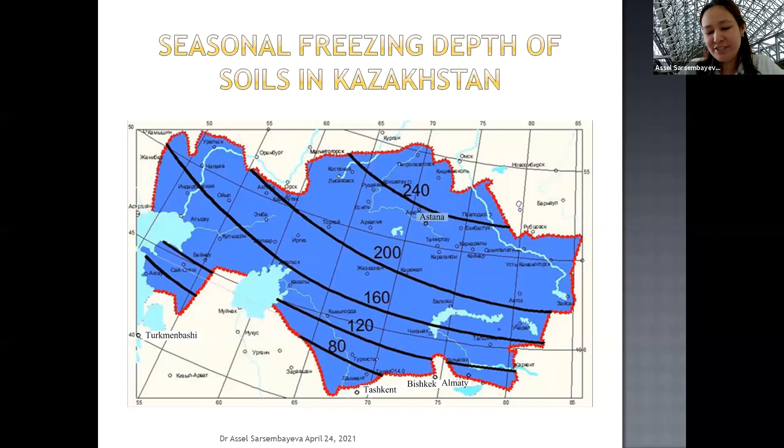We have snow and frosts in winter. The seasonal freezing depths of soils in Kazakhstan - here is our capital, previously called Astana, nowadays Nur-Sultan - the freezing depth in our capital is around 2 meters 30 centimeters. That's why mass transfer during freezing is really important in our construction.

We have snow storms occasionally. This photo was taken on 28th of January 2020, last year. It might reach 2 meters, and we usually use plowing and cleaning from snow on our highways, but it's not so awful - it's not very often, but occasionally we have such kind of weather.

So today we are going to talk about frost heave, and before dragging you deeply into the physics, let me briefly introduce you to frost heave. Frost heave is an upward swelling of soil during freezing conditions, caused by extension of the water and also by movement, by transport of water from the unfrozen part to the freezing front. This water segregates and constructs lenses which make the frost heave deformations. Uneven settlement from frost heaving causes deformation of structures and buildings, and here you can see an example of this deformation.

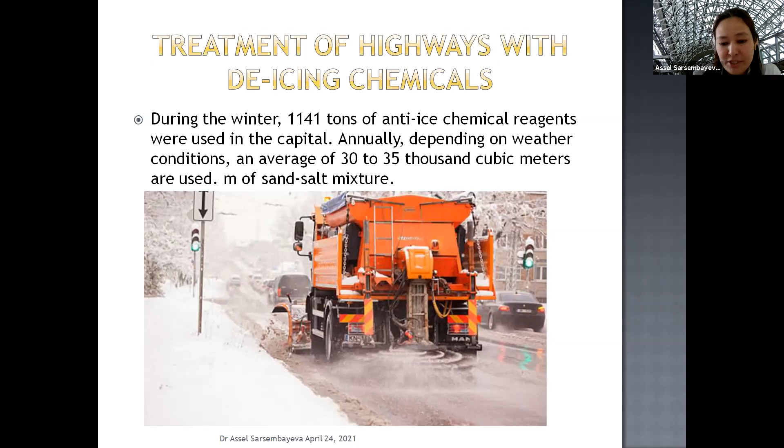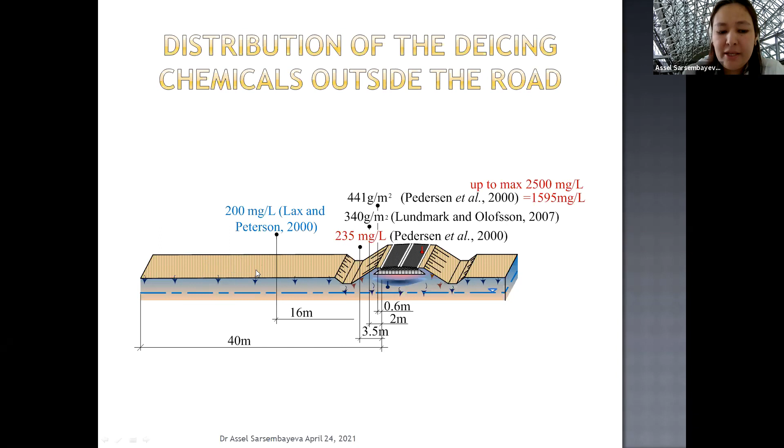Eventually, while this snow is plowed, it gets deposited on the roadside of the highways. According to the study of our colleagues from Norway, Finland, and Canada, we found out that the amount of chemicals deposited by the roadside area is definitely higher next to the road and lower, but extends up to 40 meters aside from the road. So all these treated de-icing chemicals during cleaning deposit on the roadside soils, and then eventually drop down over time.

However, we have some thoughts that these de-icing chemicals might not just drop down. We know that frost heave extensively happens under the pavement because, due to the high density and high thermal conductivity of the pavement material, the temperature of the pavement is much lower. For example, if the temperature of the pavement is -20, the temperature of the ground beside the road would be -10 to -15 degrees Celsius. So due to the temperature gradient, moisture is always moving from the warm side to the cold side. So we have some assumptions that these de-icing chemicals might migrate directly under the pavement layers.

That is why this research was conducted.

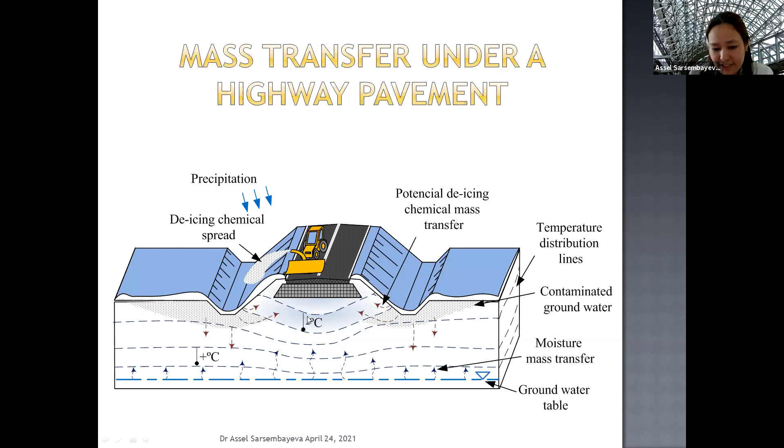Due to the frost heave happening under the road, under the highways, in springtime we meet such problems as pavement failure. So it might be surface layers, or it might be just caving of the subways.

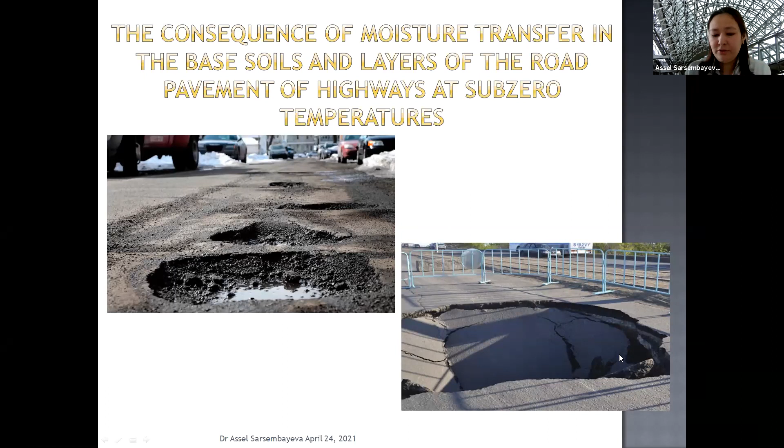So today we wanted to stop a bit, not too long, on the evolution of the frost heave theory.

Frost heave theory actually started from Taber in 1930, and it was developed by Everett in 1961, when he just used two cylinders and connected them by a tube. While freezing the top cylinder, the water was replenished to the ice, and the ice was growing at the top cylinder. That's how people understood that in an open system, meaning there is a source of water, the ice grows and causes frost heave.

The next model was the rigid-ice model of regelation, or regelation theory, by O'Neill and Miller. They made an experiment with a box of ice, placed a wire loaded on two sides onto a frozen cube of ice, and noticed that over time the wire traveled through the frozen ice under the load effect. The ice molecules were melting underneath the wire and refreezing back above the wire after it moved down. This meant that frost heave and freezing are directly related to pressure and loading.

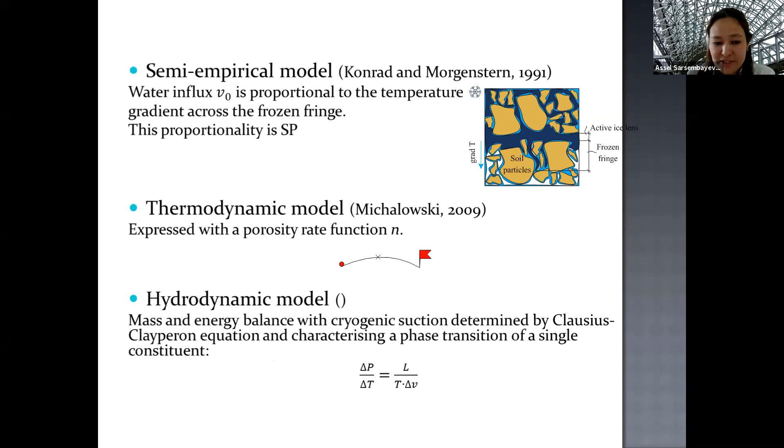Therefore, we have further research aims to study. First of all, we needed to examine the heat and mass transfer, and we got an application as highway subsoils because it's the most vulnerable element in construction, because for building construction we use piles which go below the freezing front, while in highway construction we need to layer the pavement which is above the freezing boundaries.

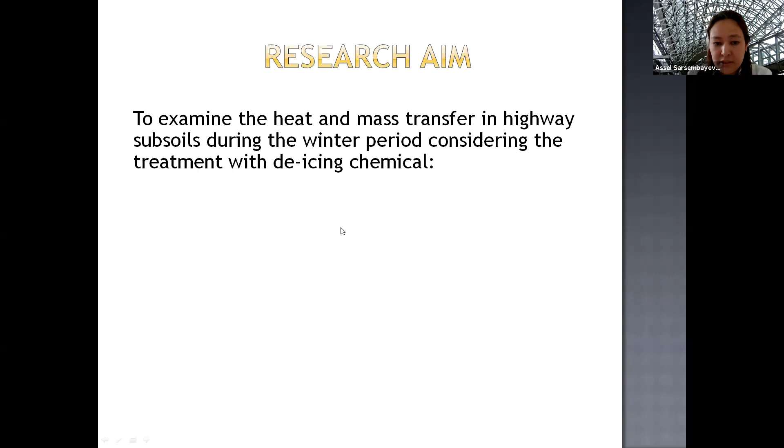So we first considered how the effect of de-icing chemicals actually affects frost heave, studying temperature and moisture distribution during slow freezing. Slow freezing is very important - it was disputed in the January meeting of the Technical Committee 216 ISSMGE, because many countries are using different test methods and are still disputing what kind of single method they want for testing frost heave. Slow freezing gives us the maximum rate of frost heave.

So we decided to do it very close to natural conditions. Second, to study how de-icing chemicals affect frost heave itself, and whether they migrate from roadside soils under the pavement. The next point is the role of vapor, because no one considered moisture exchange in a gaseous state. And the last one, we wanted to make a conceptual model of frost heave with vapor constituent.

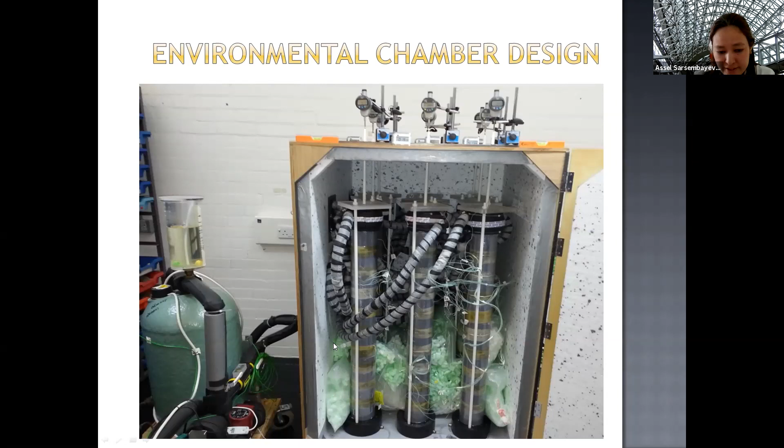The test design looks like this - this is the cooling unit, showing how we cool down the temperature at the top with the vertical linear gauge. I showed the valves so the flow might be regulated and the temperature would be the same at the top across all 9 columns. Here I showed how it looked after dropping to minus 25 degrees Celsius. To prevent condensation on top, I placed a cling film on it so no condensation might go inside, and the inner surface was lubricated with ointment and oil.

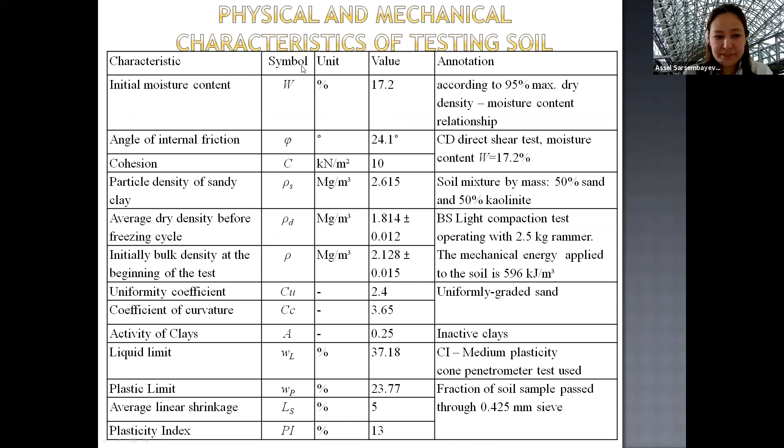This is a picolog - 12 picologs were used along with 105 thermocouples. This is the tube connected to the fridge at plus 4 degrees, supplying the sample from the bottom. The physical and mechanical characteristics, the initial characteristics of the soils, are represented in this table.

This is how the samples were made to provide the same density. The energy by hammer was calculated corresponding to the Proctor test, the standard Proctor test by BS British Standard, and it was calculated for each cylinder. They were like Lego elements, assembled with plastic collars one above another. The volume of each collar was 10 centimeters high and 10 centimeters in diameter. 63 blows were required with a 2.5 kilogram hammer to provide the required density.

So this is the way it was done - we divided it into 5 centimeter layers and made a unified structure for the sample, growing upward with the collars assembled. After that, with cling film, it was properly hydro-isolated and vapor-isolated, plus there were latex collars at the connections so no water or vapor might leak out. It was absolutely hydro-isolated.

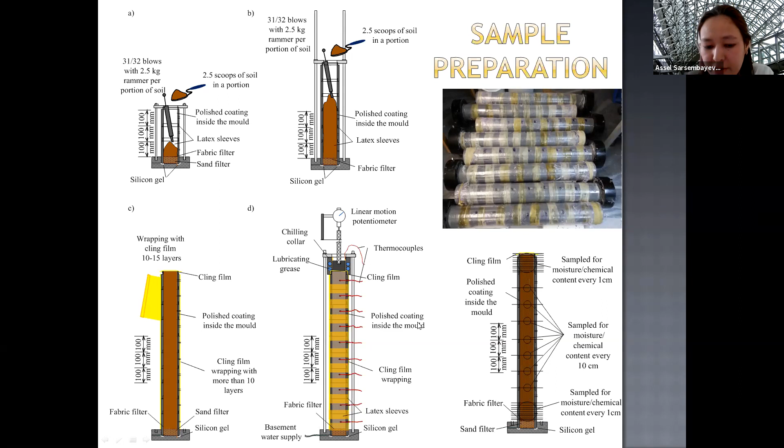How did we get the soil samples themselves? We tried to make this sample as close as possible to the natural soils of Astana, and by density, by liquid and plastic limits, we found out that the mix of kaolinite and sand makes the properties very close, and by Proctor test, standard Proctor test, we found out the maximum dry density and optimum moisture content curve.

Experimentally, we found out this curve, and we know that under the highways, the dry density which is aimed to achieve is 95 to 90% of the maximum dry density. So we got the maximum one, 1.9, multiplied it by 0.95, and got the desired density under the highways. It corresponded to 17.3, 17.1, 17.3 moisture content. So we got these parameters to use as initial for these soils.

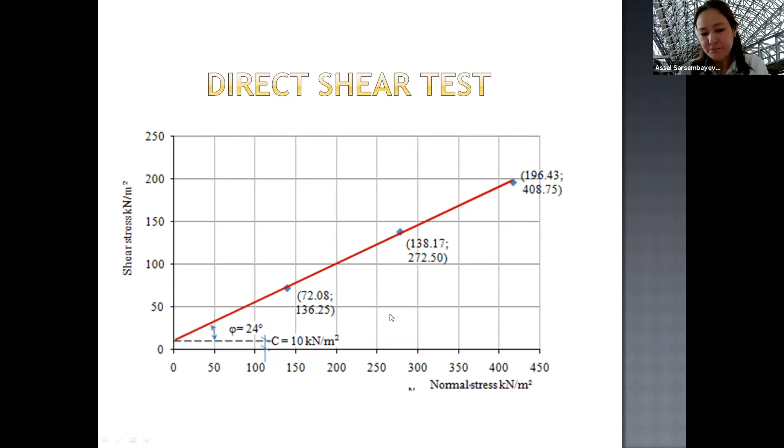We conducted several CBR tests, a series of CBR tests in a triaxial rig. There is a surcharge on top of each sample, and in our testing sample there is a surcharge equal to 3.5 kilopascal. This surcharge represents the weight of the pavement.

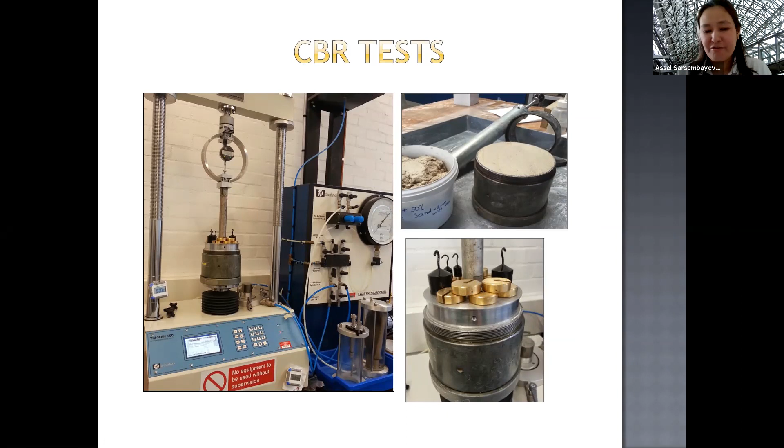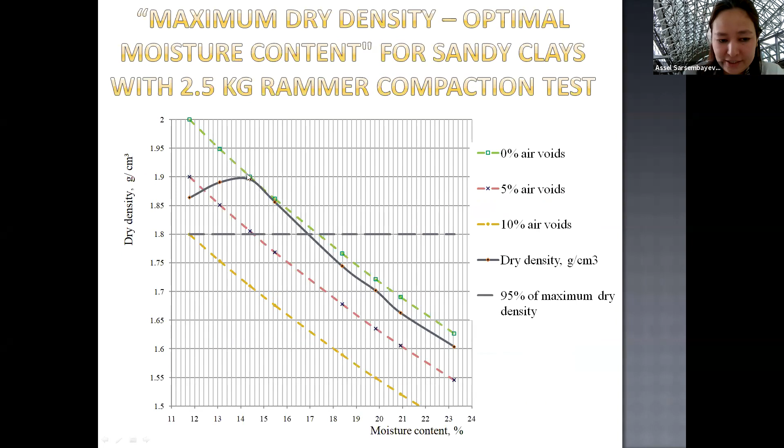So by California Bearing Ratio, we found that at 17% moisture, we got 10% of the required bearing capacity. While at maximum level, at 14% moisture content, it was 100%. So we got it as 100%, and while increasing the moisture to 17%, we found it dropped from 100% to 10%. So initial bearing capacity was 10% by the California Bearing Ratio test procedure.

The temperature was decided to be cooled down by 2 degrees per day. It started from 0, or just above 0 at plus 3 degrees, to initiate freezing at the top, by 2 degrees per day, down to minus 24 degrees by the 12th day.

So there were 2 freeze cycles, traditionally conducted by all the countries, and totally it took around 25 to 26 days. So the temperature was dropped, and then it was raised, and then dropped again.

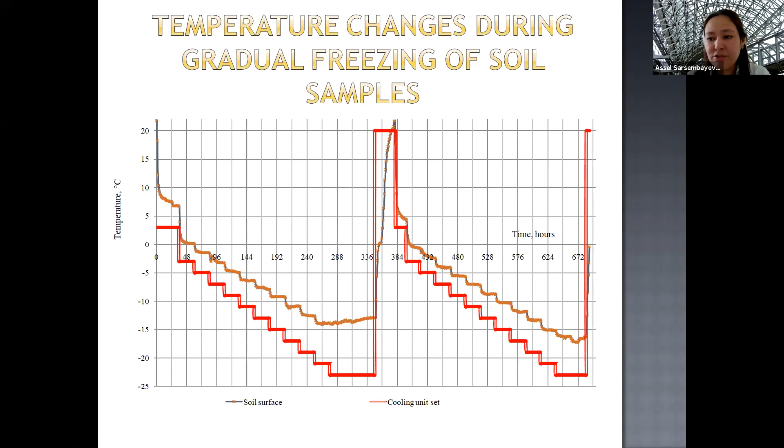After this experiment, we measured how much water or chemical solution migrated to the top of the pavement layers. So sampling after the freeze test, you can see there is frost heave occurring at the top of the soil. Sampling was, as I said before, every centimeter at the top and 10 centimeters at the bottom side.

So there are some frost heave observational results. This is with deionized water, so clean water, frost heave, and the temperature drop. The first cycle finished, the second one, the temperature got even lower. However, the frost heave increased because the water which is dragged to the top required more energy to be removed, to be taken out, to cool down the soil. Therefore, there was more water dragged.

This is in the samples supplied with 11 gram, or 11,000 milligram per liter. So the samples, instead of water, were supplied from the bottom with chemical solution. And we see that the frost heave is decreasing here. It's obvious because chemical solution does not freeze at negative temperature.

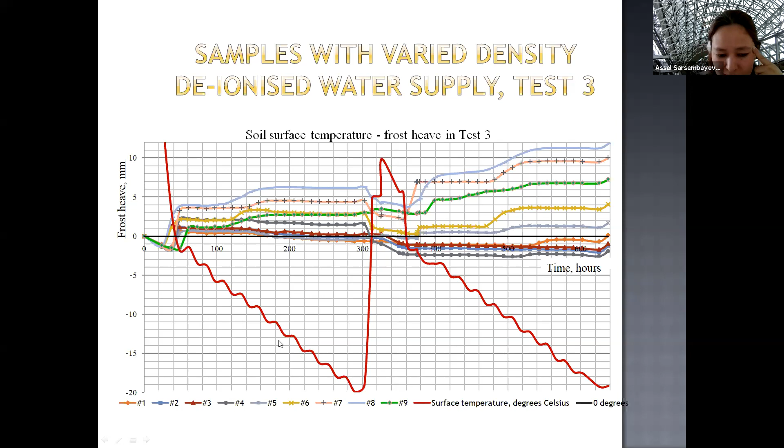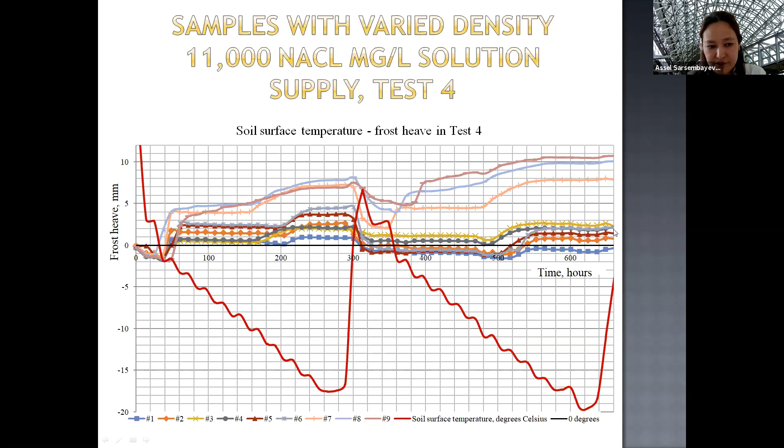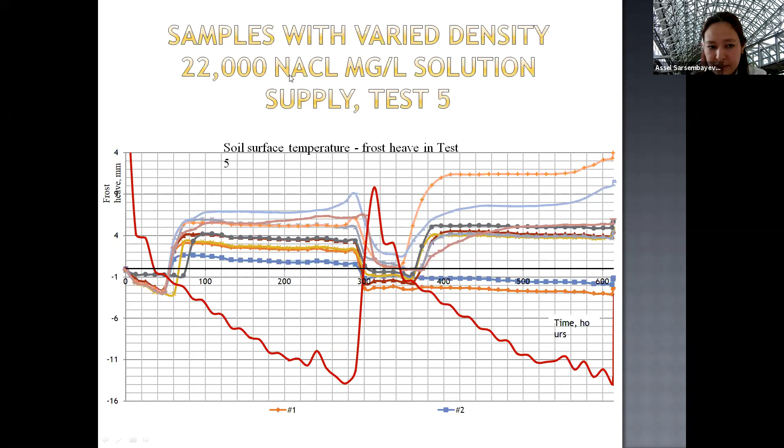In the 5th test, the chemical solution concentration was increased twice, to 22 gram per liter, or 22,000 milligram. This is sodium chloride de-icing chemical. And we observed the temperature distribution using the Picolog system.

We can see here that the top temperature, zero temperature, goes almost to the bottom, but it's not freezing the entire sample. It's freezing around 85% or 85 centimeters of the sample. In the second freezing cycle, it's not freezing at all because so much water was dragged from the bottom upward. That's why more energy, more heat, was required to be extracted to drop this temperature downward. That's why it was completely different.

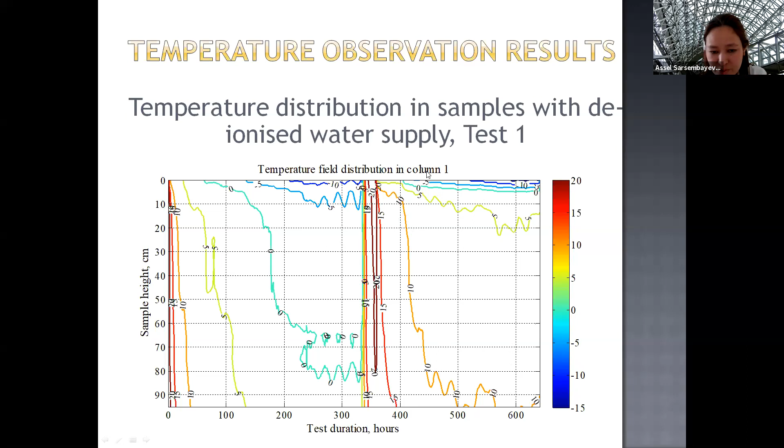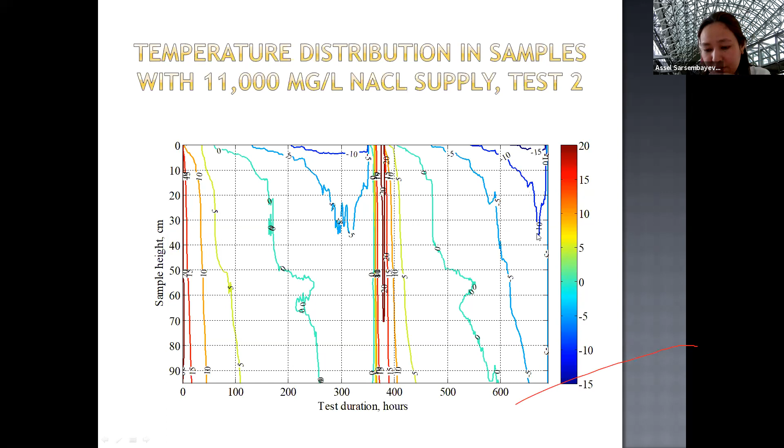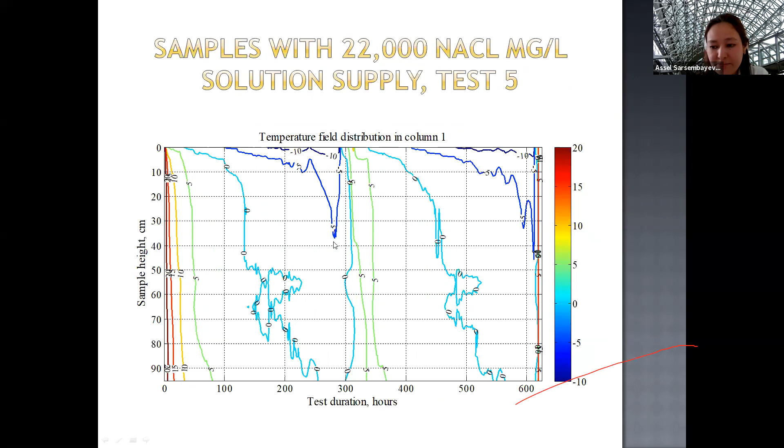While in the de-icing chemical solution, we can see the opposite picture. It seems that the sample was frozen completely. However, because it was de-icing chemical, it wasn't segregated. There was no ice, just negative temperature, and we can see that temperature dropped here up to -10, -15 degrees. This is sample 3, 4, and 5, and we can see similar patterns over here.

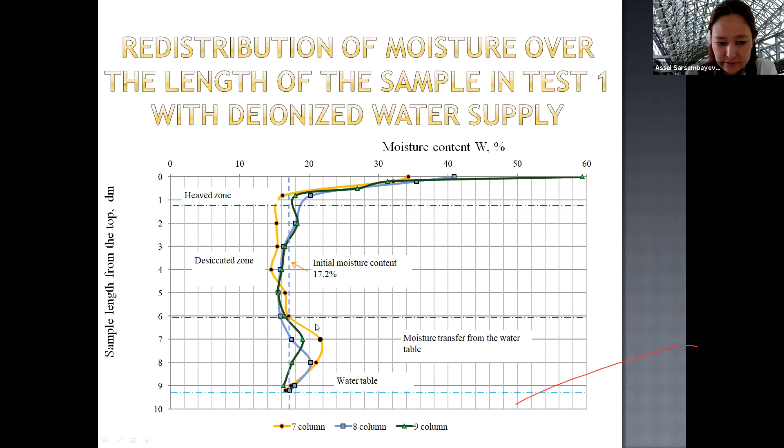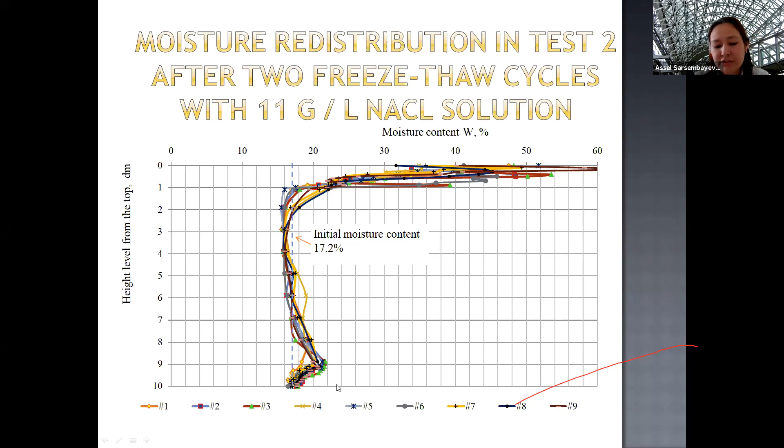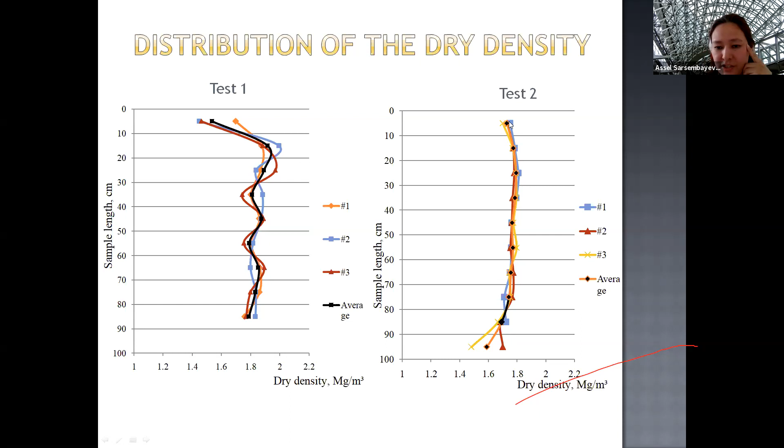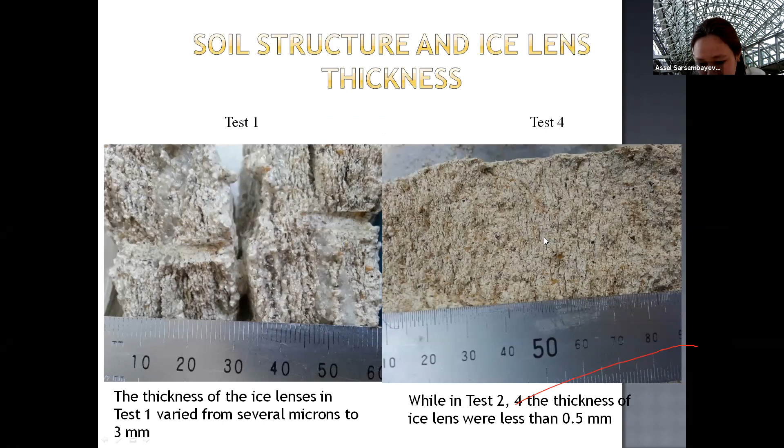Distribution of the dry density: here we can see that while supplied with clean water, there's so much change in dry density because of ice lenses that were formed - big ice lenses, thick ones. In supply with de-icing chemicals, there wasn't much change in the dry density. The soil structure and ice lenses looked like this on the cut. Supplied with clean water, we could see around 3 millimeters lens of ice, while supplying with de-icing chemical, there were just tiny microscopic lengths less than half a millimeter.

The bearing capacity changed directly with the moisture content change. In parts where moisture content was more, the dry density decreased, and the bearing capacity dropped dramatically. While in the zone of desiccation, it was around 16, bearing capacity increased. So it was like layers of decreasing and increasing bearing capacity.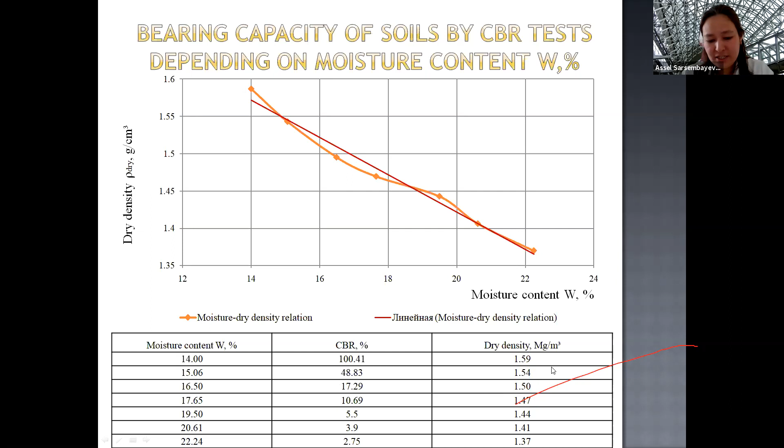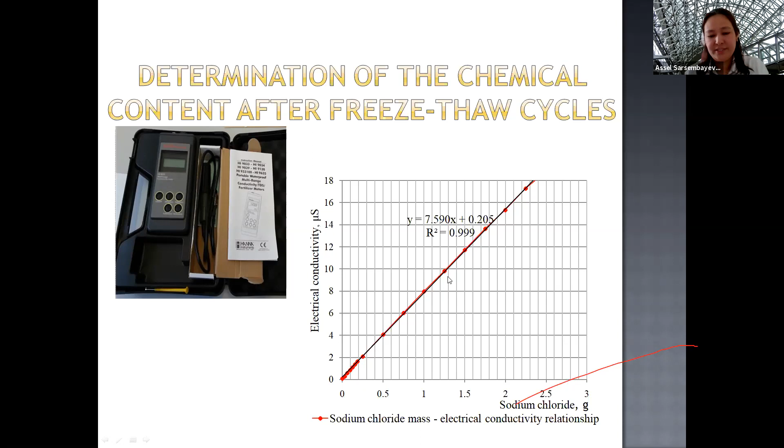What about the chemical content? Did it move or not? We conducted a test with electrical conductivity measuring apparatus, which was calibrated before. This is the reference zero, the electrical conductivity at the initial stage of the soil, while these are after the salt was added. We made a calibration chart first, then found out that de-icing chemicals migrated to the sample over the entire length of the soil.

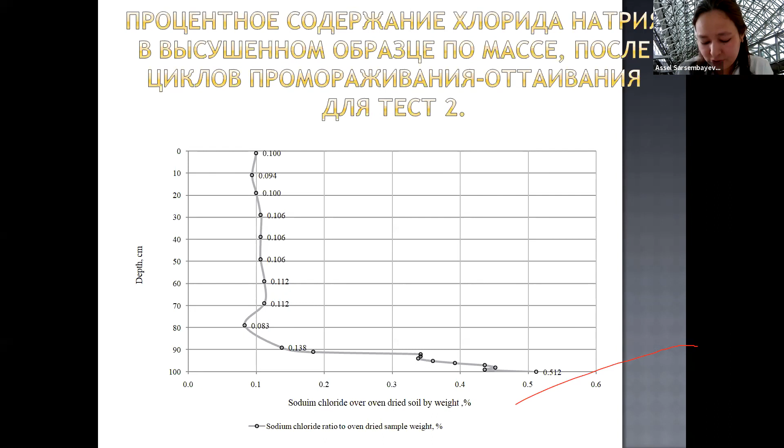So this was the initial stage of electrical conductivity - again, that's referenced zero. We found out that the sample was salinized, saline at the end. What does it mean? It means that the designed characteristics of the soil are changing over time if we are treating them with de-icing chemical. After a year or several years, there are no more design characteristics of the soil - it becomes saline.

The movement of de-icing chemicals was explained. Why did we actually research this? Because there were controversial issues in different research. Some said de-icing chemicals are not moving at all due to frost heave. Some said it might move. However, we proved here that de-icing chemicals migrated the entire length of 1 meter due to cryosuction forces.

If we consider the film water, which transports the de-icing chemical cations and anions, the molecules of water eventually turn to ice. However, we know that by osmosis, the more chemicals we have, the more water is pulled into that side because of the osmosis force. So there are two forces affecting the sample during frost heave: the first is cryosuction and the second is osmosis. However, cryosuction force is greater than osmosis, that's why the movement happened.

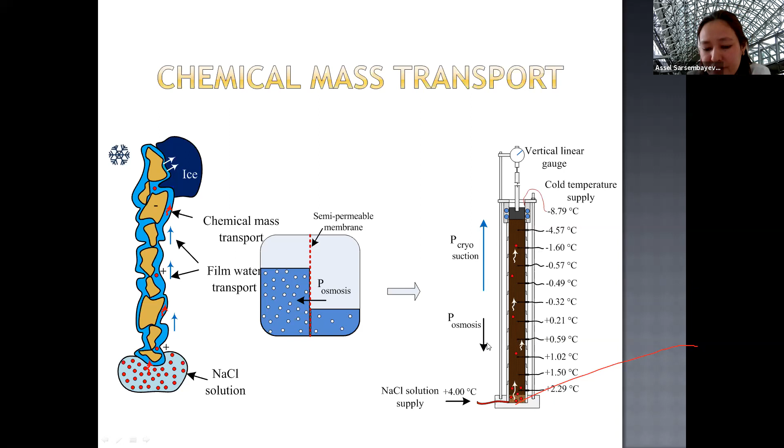Let's imagine we have a closed system. In a closed system, there is phase balance always, and unless the system is saturated, evaporation happens from the liquid phase to the gaseous phase. It happens until the system equilibrates.

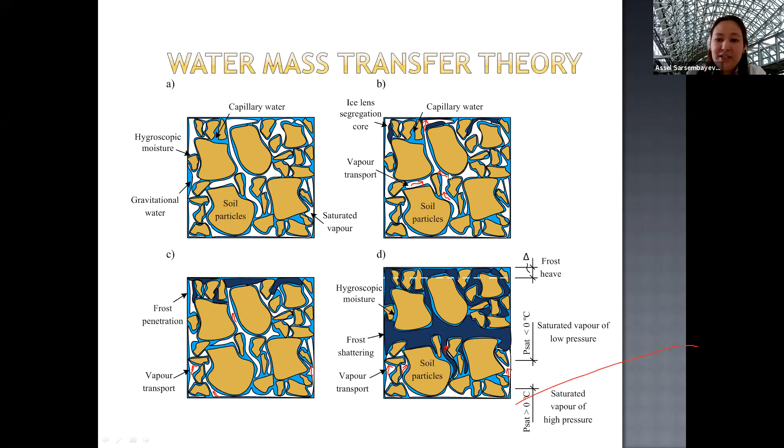We consider it vapor because it's not possible for water to move here since everything is frozen now. So gas may leak to the tiniest elements of the soil, tiny bits of the soil cracks and fill it in. That's why we consider that mass transfer is happening probably by the gaseous stage.

Here I would show you another example. This is an ice vein, showing how the water molecules in gaseous stage were moving. They formed first lenses by this ice vein, then occasionally it's filled out, the freezing continues, it's starting to fill the next lens, and the frost shattering happened due to the thickness of this ice lens. It just cracked and filled out with gas, with vapor again.

That's how it happens. I wanted to say that classically we thought only two phases are in charge in frost heaving. However, there are three phases in charge. That's what we wanted to say.

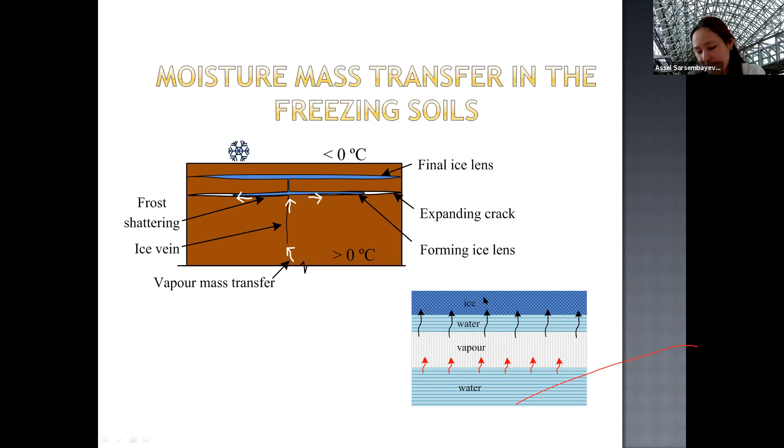So the water firstly turns to vapor, and this vapor migrates to the place with negative pressure, and then it might go back to the water and ice stage again. Sometimes the vapor stage is so quick that it just solidifies from vapor to ice due to negative temperature. The calculation for the equilibrium between water and vapor phases in porous media can be represented by this formula.

So amount of water, depending on the pressure and temperature, is in equilibrium with vapor, depending on the pressure and temperature. However, this happens when the temperature is constant.

Again, if it's not constant, if one side is cold and the second side is warm, it provokes the movement, initiating the movement. The mass of vapor can be calculated by the known formula in physics, where mu is the molar mass of vapor, and P is the saturated vapor pressure corresponding to the temperature.

I told before that pressure always tries to be saturated, because if a system is unsaturated, evaporation continues. So it stops, the drying out stops when the vapor is saturated. This is the volume of the air in the soil. The universal gas constant is equal to 8.3, and temperature is in Kelvin. So we can calculate the mass of the vapor in the closed system.

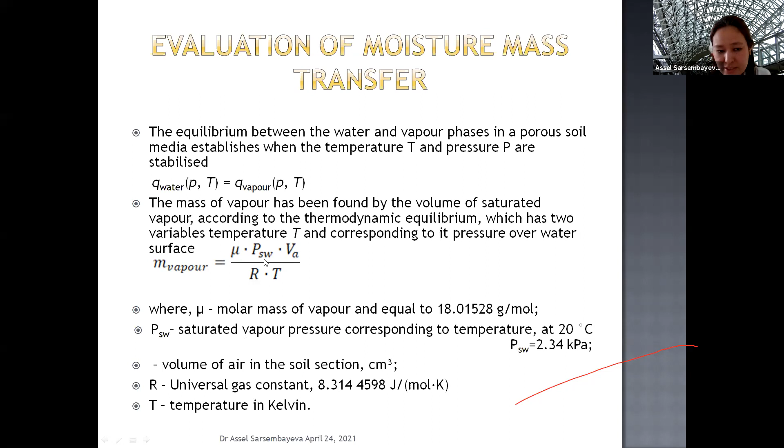We know from classical soil mechanics how to calculate the amount of soil particles, mass and weight, and volume of the liquid part, and we know how to calculate the volume of the gaseous stage. We just turn it into these vertical tubes, just to transfer it, to calculate it. So this is the same - we could find out the volume of these three phases.

We just turn it by knowing that the formula of volume of a cylinder is equal to pi D squared times H, and we can easily transfer it to the cylinders. So we got a channel now - we got a cumulative channel of the air of the gaseous stage.

And the volume of vapor passing through this channel is equal to the velocity, to the time, and to the diameter of this cumulative air void, this cross section actually. So it's possible to calculate how much moisture is moving through the soil. It's possible to predict it, and it's possible to explain it by general physics.

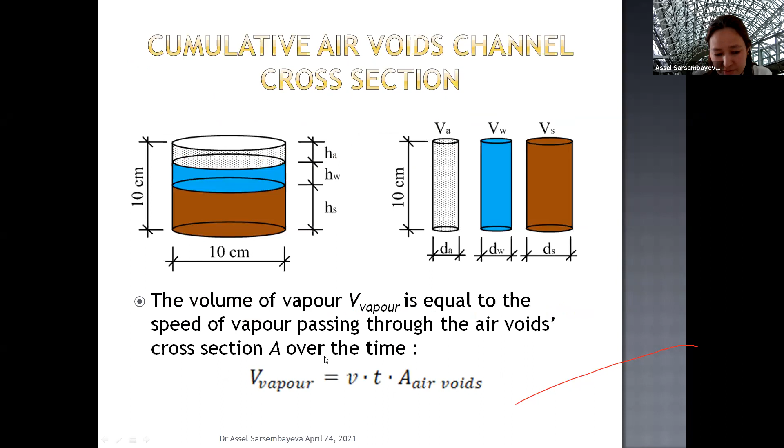So we're just turning the air voids. We said before that volume of the air channel is equal to density, velocity, time, and cross-section. So here we can just calculate the mass of ice built in a certain time. And this was the novelty, actually, an application which makes it possible to turn all the knowledge we did before.

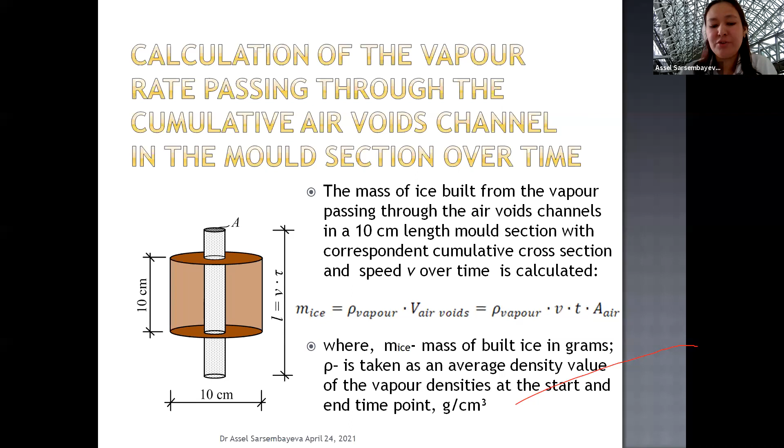The difference from the previous knowledge is that we do not use Darcy's law, we do not use hydraulic conductivity, because it's impossible for water to move in a liquid stage in the freezing media. It might move in a very tiny amount by the hygroscopic films, by the hygroscope. Only hygroscopic water can move. All these transfers happen by vapor, by gaseous stage.

The results of this work regarding the de-icing chemical mass transfer were published this year and the previous year in Cold Regions Science and Technology and Transportation Geotechnics. The vapor mass transfer model is going to be presented soon as a manuscript is being prepared.

The algorithm of vapor flow calculation in unsaturated soils using the presented fundamental thermodynamic equation was presented here. And the testing method was developed by slow freezing and increasing the length of the sample.

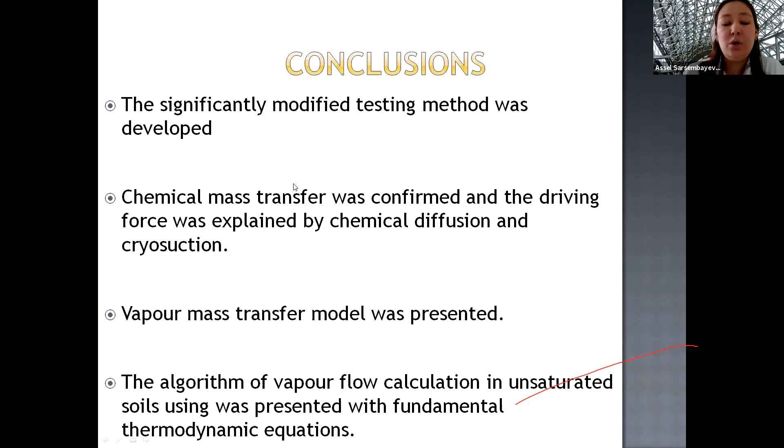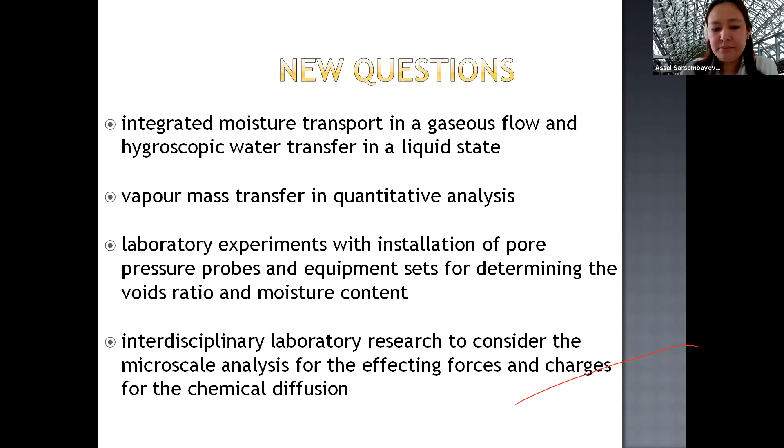There are some new questions for the new upcoming doctoral students if they want to work on this, and there are some interdisciplinary laboratory research to consider. At the moment, we are working on the in situ tests, possible to prove or consider the frost heaving process in Nur Sultan. And my long presentation is over.

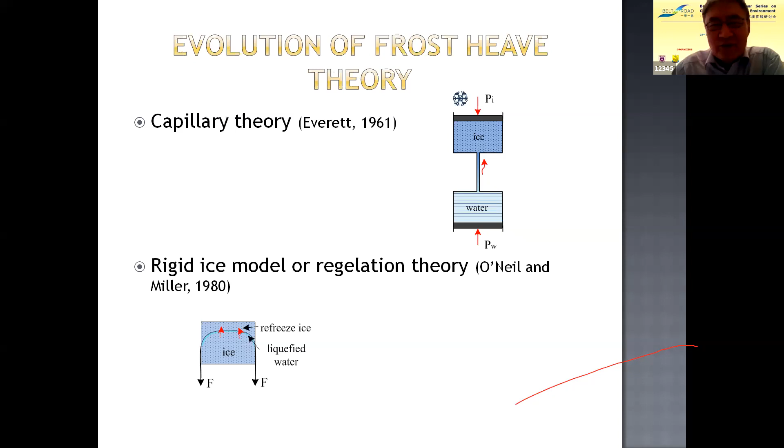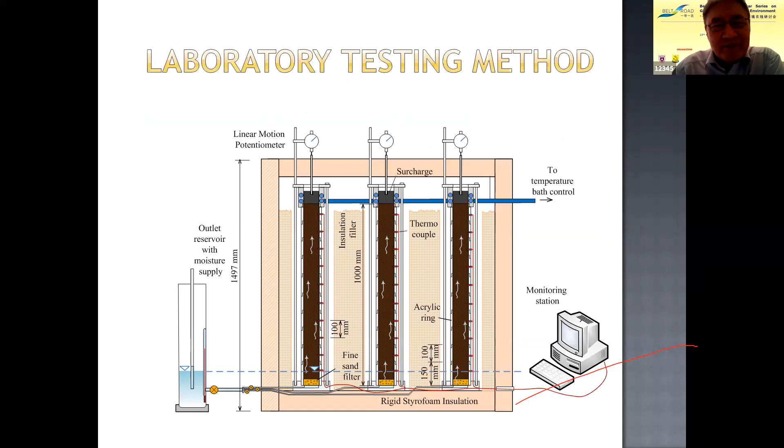Is there any other questions? If no, maybe from students - we have students from Kazakhstan, from Russia, a very big group from CIS countries, especially Kazakhstan and Russia. Please, students - Elena, here from Russia? Elena, yes Braga, I'm here. Tyumen is in South Siberia, you must have some questions, please be active. No, I haven't questions. Okay, we have several PhD students here, not only from Russia but also Kazakhstan, so I want to reactivate Kyrgyzstan too - Dr. Gulzat maybe also has questions. No questions, huh? Okay.